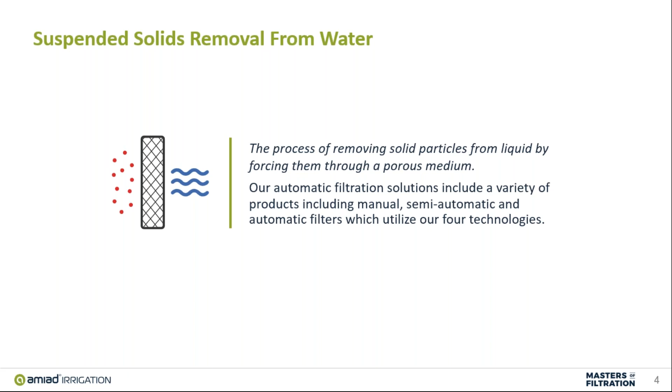Filtration is suspended solids removal from water - the process of removing a solid particle from liquid by forcing them through a porous medium. Our automatic filtration solutions include a variety of products, including manual, semi-automatic, and automatic filters, which utilize our 4 technologies, which we'll talk about throughout this presentation.

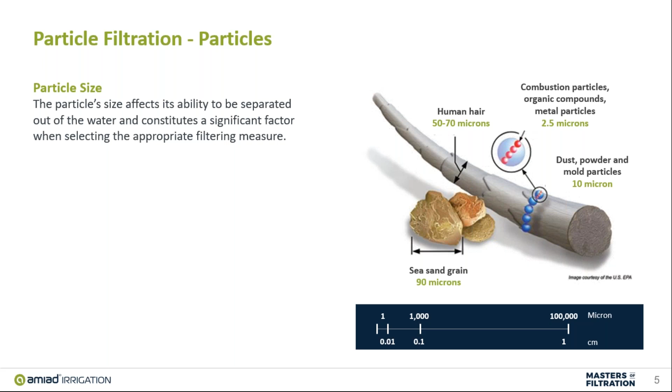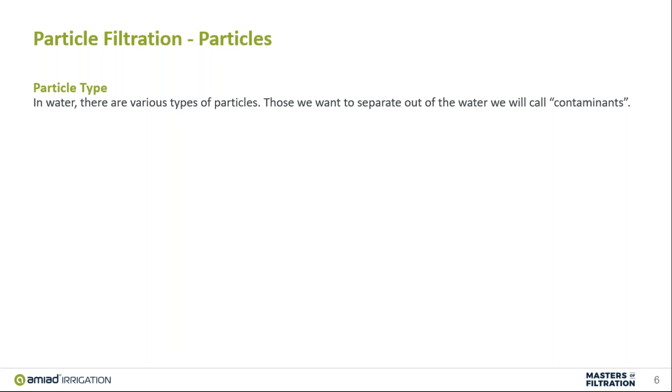Particle type - in water, there are various types of particles. Those we want to separate out of the water we will call contaminants throughout the presentation and our discussions. The contaminants are divided into three main groups: the first being mineral contaminants - sand, silt, debris, iron. Then we have biological contaminants, which is where bacteria and algae come in. And then we have our dissolved solids.

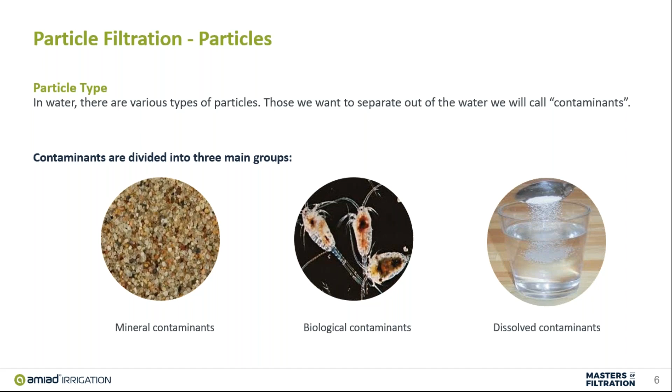So the effects of non-filtration is clogging. Why is clogging or debris in our irrigation systems important to know and understand? Well, in order to understand that, we need to understand our emission devices and the things that we're trying to protect. Severe clogging affects our distribution uniformity, the term used to define a system's efficiency and performance. For every 10% decrease in distribution uniformity, it's calculated as 30% wasted water. This is important in our world with water being such a scarce commodity for us.

Especially when we're discussing emission devices, our industry is moving to lower application rate emission devices, precision nozzling, smaller orifices on our drip systems. This makes for a finer diameter hole that allows our water to emit through, which can cause issues if we have debris and contaminants in our water. This will drive up maintenance costs - not only labor in terms of cleaning those nozzles or drip systems, but also replacement of those emission devices if they get clogged up and go bad.

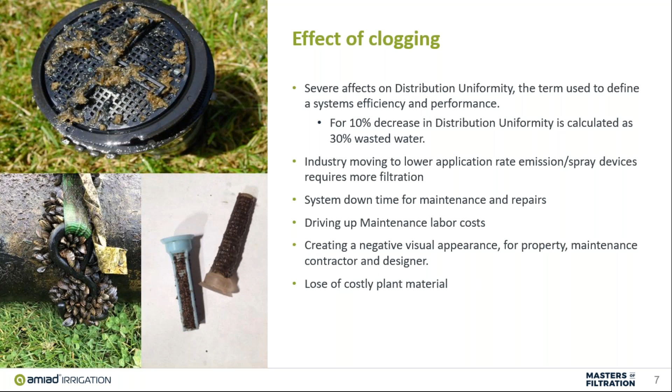So the main defense against clogging is mechanical filtration. The filter element traps and removes suspended solids from the water, not dissolved minerals like salts, but the suspended solids.

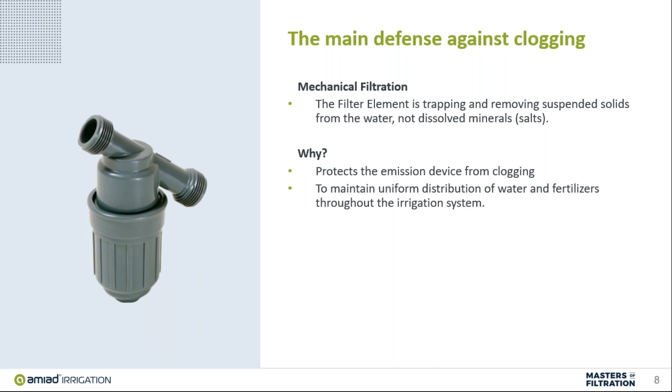So why again is this important? Well, it protects our emission devices. It's like an insurance policy. We put in our filters and we capture those things that are going to cause havoc in our systems, and this will help maintain our uniformity and distribution of water throughout our irrigation.

Part of filtration, we have to understand the water sources that we're dealing with. In the US, we have quite a few water sources that we may see throughout the different areas, and some are more prevalent than others.

Many of us are familiar with municipal water, potable, culinary water. This is generally good, clean water because it's filtered or cleaned at the water districts before it's supplied to you. But we pay for that—it's an expensive resource that comes to our homes and businesses. This still requires some sort of filtration because there's still some suspended solids that travel in that water.

And if the instance comes about where you have damage in a line or something like that where solids can get into your line, it's going to wreak havoc on your irrigation system downstream.

Surface water has been used for many years, but it's becoming more and more readily used as it's available for us. This water is generally poor in quality in terms of debris, suspended solids, algae, and those items that cause havoc on our irrigation systems. It's a lower cost, but it's going to come with an expense to filter.

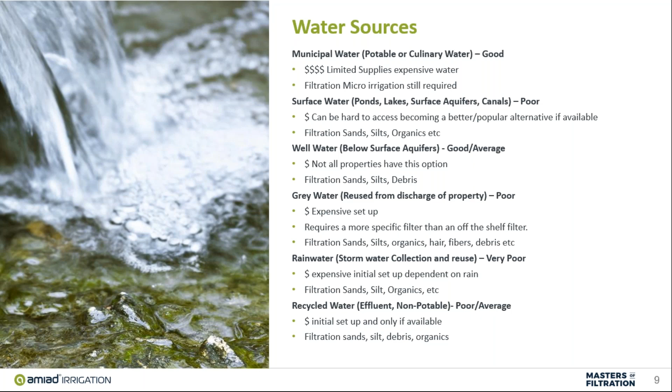All right, so principles of water filtration. We're going to talk about the terminology, the things that come up that you may or may not understand, but maybe we can address those and help resolve concerns so that we understand filtration and what it needs to do for us.

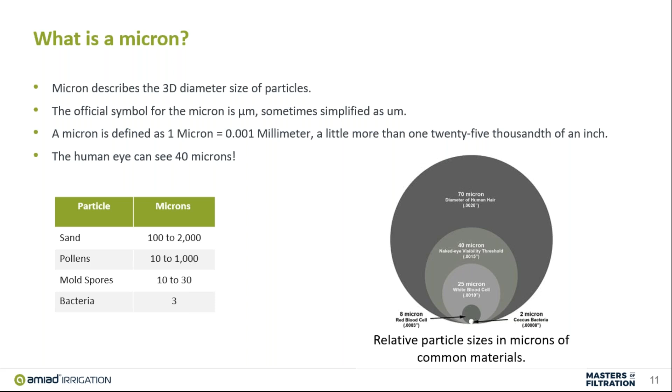Micron is important now that we discuss filtration size. Declared filtration size is based on micron, the results of performance tests done by an official lab. A filter size will be determined based on it capturing or restraining 85% of the particles in that size, so they won't be able to go through the filter. This is done by a third-party lab, an IFTS.

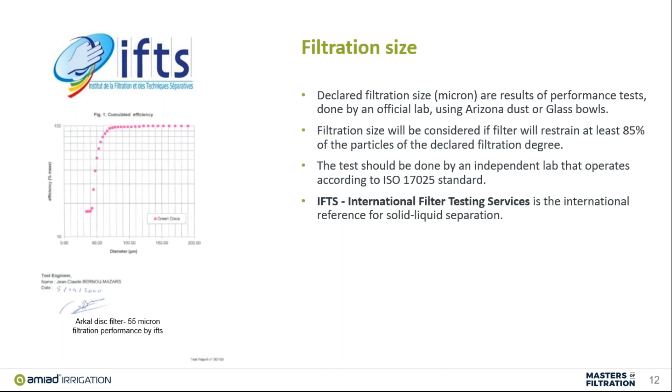Amiad's filtration spectrum by technology ranges anywhere from 1 micron to 10,000 microns. So pretty much, if you have a filter need, we have a filter that can solve the problem.

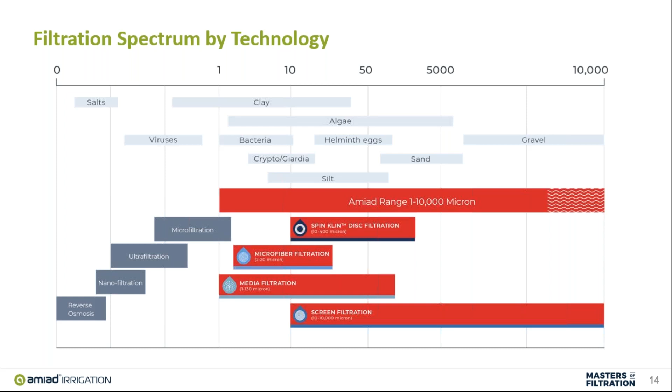There are multiple different technologies for filtration. There are discs, which are widely known in the landscape world. Screens, again, widely known in the landscape. Media, which is known more in the ag world, and separators, also known more in the ag and industrial world.

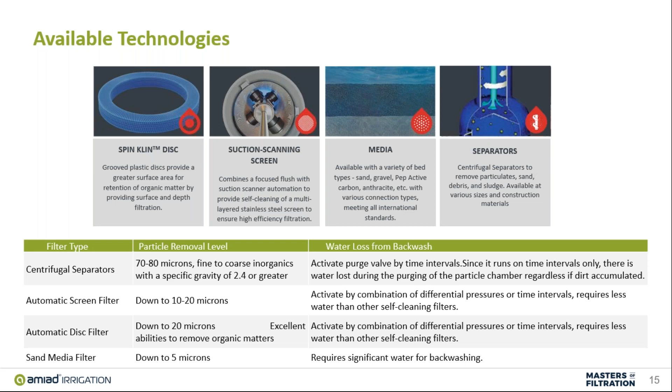We're going to focus more on disc and screen filters, and talk a little bit more in depth on screen filters in this presentation.

Filtration results: before, this is 500 micron, and after. You can see how much debris comes out after the filter. Imagine limiting that down and not having the larger debris going through your system, clogging up your heads, your nozzles, and your drip systems.

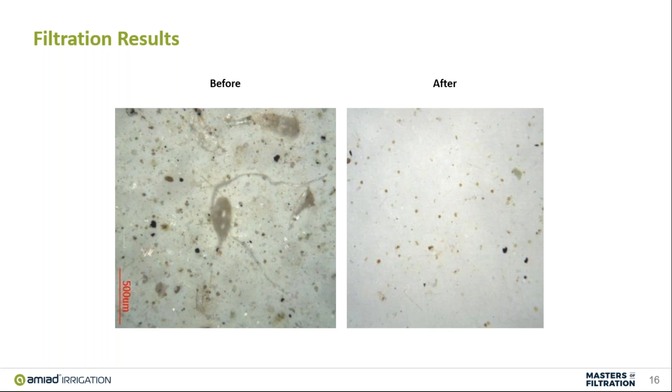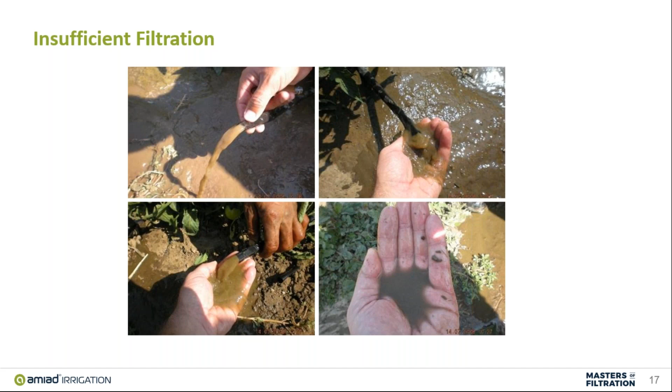This is another picture of insufficient filtration. We don't really want to see dirty water coming out of the lines, because as you can imagine, every one of those clumps or chunks is not going to make it through your drip system, your precision nozzles, or your rotator nozzles.

All right, micron versus mesh. Everybody knows about mesh. Micron is not a new term or new technology—it's actually a more accurate way of measuring things for filtration. The definition of mesh is basically how many wires or fabric lines there are in 1 linear inch of screen.

This definition is actually taken from the garment industry, where our shirts and sheets were made—how many lines of garment or fabric are in 1 inch of screen area.

In this filter world, it's screens or wire. A micron is actually the dimension of the opening of the screen between the wires. So you can see the difference between the terminology and the measurements. And obviously, as you go up in mesh, you go down in micron.

In the landscape world, we're probably familiar with 70 to 80 to 100 mesh. If you convert that over to micron, it's 210 to 149 microns. But you can see how the measurement of mesh doesn't take into consideration the thickness of that wire—it only takes into consideration how many wires are in that inch. So you can see how that term can really have a large variable in there.

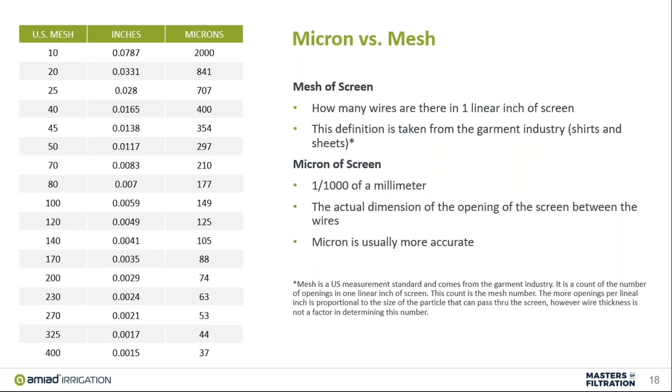This is why we lean on the word micron and use that in our terminology.

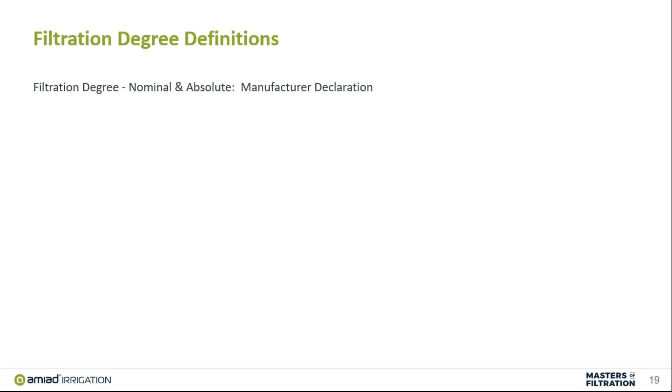All right, filtration degree definitions. There are two definitions we need to discuss: nominal and absolute. Absolute filtration rating means all particles larger than a specific diameter are removed 100%. Nominal means most particles larger than a specific diameter are removed 85 to 99%—again, the Lysol commercial, where you have a percent still sliding through.

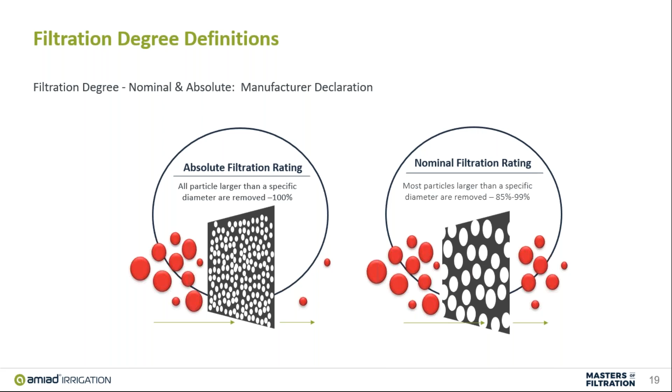So, filtration degree definitions in different screens. On the left, a perforated screen is only going to have the rating of an absolute. The wedge wire, on the other hand, is going to have a nominal, or vertically, and an absolute side to side. Weave wire will have a nominal and an absolute.

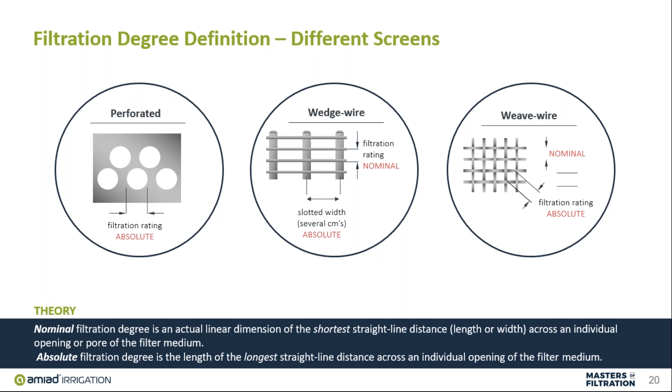All of this talk comes into play when we talk about effective filtration area. When we look at the area of a filter medium which is exposed to the flow of particles in the filtration process, the effective area of the Amiad multi-layer screen element is 95% of its total area. So that means 95% of our screen area is part of the effective filtration area.

We'll talk about why that's important when we get down to our manual filters, and how that affects flow, water use, and cleaning the filter.

Again, filtration velocity equals the flow rate over effective filtration area.

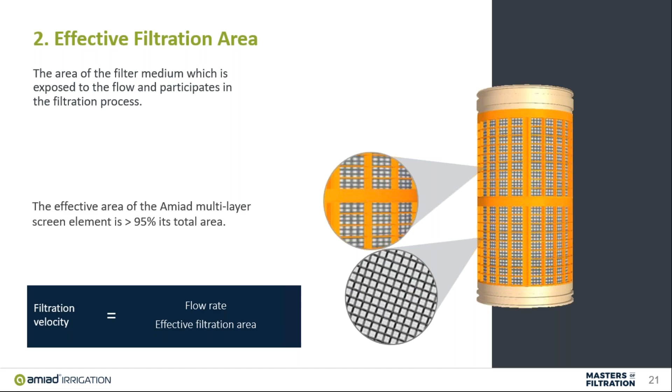Screen filters have 3 different cleaning cycles or styles of cleaning. There's manual clean, where you physically remove the filter element, scrub it, wash it, clean it out, and put it back together. There's the back flush, where you have a valve on the bottom of the filter you can open up and it washes out most or any particulates it can get out of there. And then you have the focused backflush, which is a reverse water flow through nozzles concentrating cleaning to less than 1 square inch, which increases suction force.

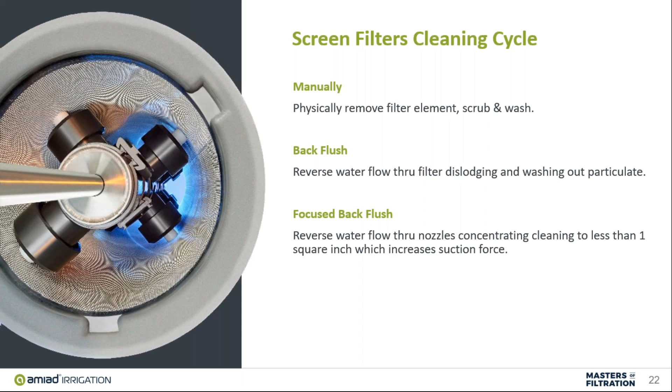When we talk about comparing the levels of technology—manual, semi-automatic, or fully automatic—we want to compare those technologies with the type of water that we have and how that comes into play with what we would select for our project.

Water quality is probably our primary consideration when it comes to selecting whether you would use a manual, semi-automatic, or fully automatic system. If you have decent water, a manual system could work, meaning you're not going to have to clean it more than maybe once every few months, and it's accessible, easy to get to, and not a huge ordeal to clean.

On the other hand, if you have good to average water and you don't want to spend your days cleaning a filter, semi-automatic is your choice, because you can still access the filter and clean it without disrupting the system, and you don't have to take it completely apart to do so.

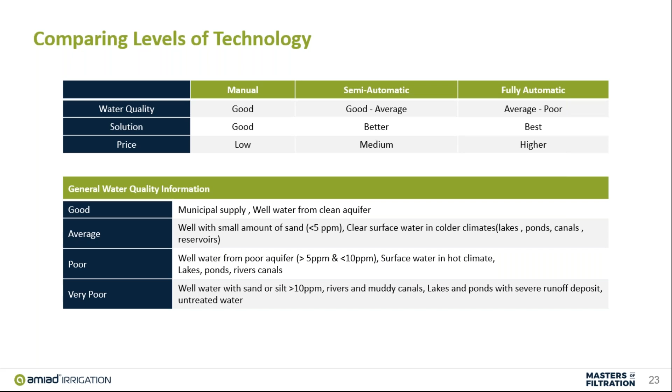Now, on the other hand, if accessibility to the filter is difficult, or if you have average to poor water, you're better off looking at a fully automatic system that will do the cleaning for you without taking your labor time. And again, we've talked about our water supplies in terms of whether good, poor, average, or very poor, and we have a list of them based on what we've determined throughout the nation.

Considerations for sizing a filter—and this isn't necessarily sizing in terms of pipe size, this is sizing based on flow size and what your irrigation demands are. Number one is your flow rate, your gallons per minute—how many gallons per minute you're flowing through your main line or the system we're going to put a filter on. Number two, your static and dynamic water pressure.

This is critical. We want to know this in order to determine what filter will work best in that application. Number three, your water source, whether it's average, poor, or great. If we understand this, we can find a filter that will fit that project.

And then, what are you protecting? That's a big question. Most irrigation manufacturers—nozzles, heads, drip systems—have a recommended micron filtration degree that they'll put on their packaging or spec sheets, which will help you know what you want a filter to do. Utilizing that information will help you select your filter.

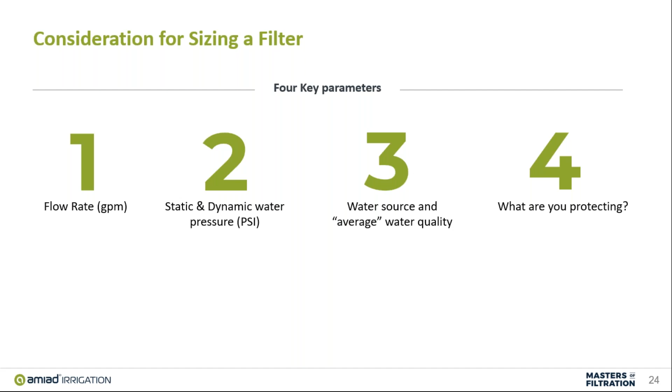Generally speaking, with Amiad, you'll find there are probably 2 to 3 to 4 different filters that we could recommend for any given project, and they'll be successful.

So let's go through some of our filter types and how they can help us and how they apply to our projects.

Manually operated filters—there are pros and cons to any kind of filter you're going to purchase. One of the pros of a manually operated filter is its low cost, simple installation and maintenance. Some manufacturers offer a high quality 316L stainless steel screen. Typically the material used is a polypropylene housing for corrosion resistance. Common sizes for a manual filter range from 3/4 inch to 3 inch.

The cons for a manual filter are that it's time consuming to clean—it takes time to put it back together, and your system has to be off during that process. So when dealing with a manual filter, you want to consider all those options you're going to see in your irrigation landscape. Accessibility is a big one—if you can't get to your filter often enough to clean it, it's going to clog up and you're going to have a distribution uniformity issue or an efficiency issue in your irrigation system downstream.

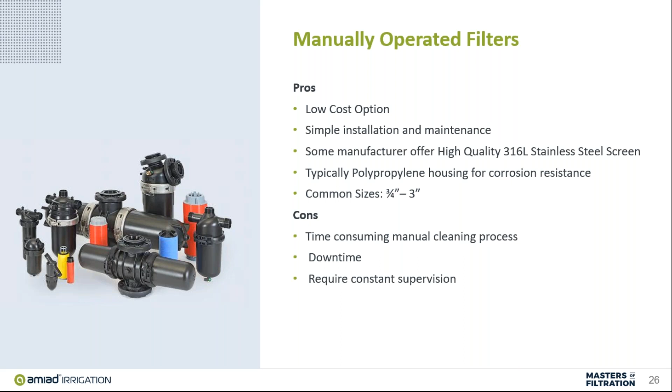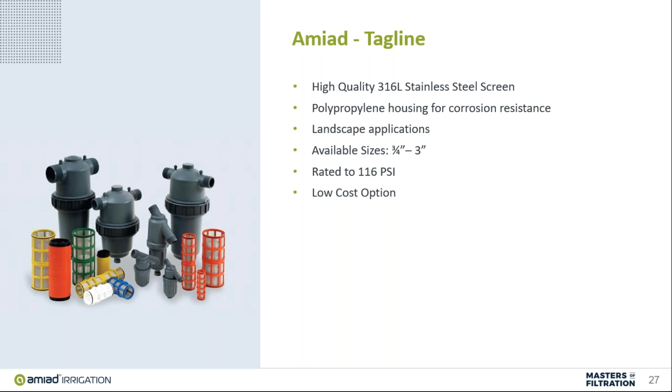Amiad Tagline is the manual plastic filter we have for this application. All of our screens are high quality 316L stainless steel. This is important to know because they're not just coated steel, they're through steel, for corrosion protection and strength. They're all polypropylene housing for corrosion resistance. This is a great filter for landscape application. The available sizes are 3/4 inch to 3 inch, rated to 116 PSI. This is a low-cost option and a great product for your typical landscape application if you need a manual filter that you can get to and clean in a timely manner based on water quality.

All right, I put this screen here for a reason. There's some important things to discuss here. We talked about effective filter area, and we talked about the square or the dimensions of the filter and how that relates to the importance of a filter and timeline of cleaning.

This is how this becomes important for us. When you double the surface area of a filter element, you quadruple the time between cleaning. I want that to be real clear. When you double the surface area of a filter element, you quadruple the time between cleaning.

Most of the screen filters you will see in the industry have about 200 to 250% less screen area than our screen areas on the Amiad tagline, on any general filter that we have. Again, when you think about that and you double that size, you decrease the time you clean by 4 times.

So just think about that when you're going out and putting in a manual filter, and you think, well, if I'm going to have to clean this with the dirty water and the screen area is this, and I'm going to have to clean it every month, if you put one of ours in, you would only have to clean it every 4 months. So it's important to remember that stuff when you're purchasing filters and putting filters in a project.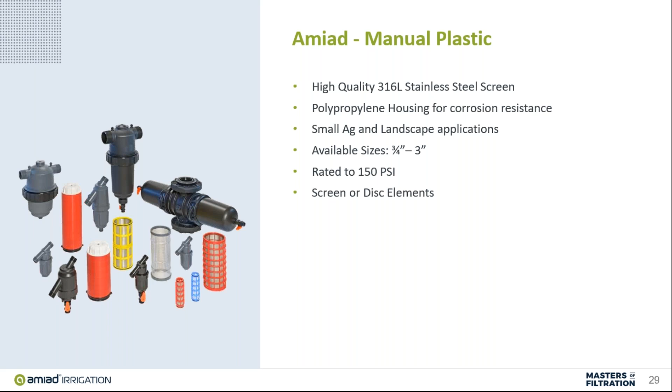All right, semi-automatic filters. Why would you use one? Well, the pros are they're a low-cost option. They're minimal cost and they're simple installation to put in and somewhat simple maintenance. Some manufacturers do offer the high-quality 316L stainless steel screen, the polypropylene housing or steel housing.

Typical sizes on this are 2 inch to 8 inch. They have clogging indicators, or some have clogging indicators. It can be cleaned without interrupting the irrigation cycle. This is important to remember. You can clean these without turning off the irrigation downstream.

Whereas the manual, you have to shut the system down, open it up to clean it. It requires a low pressure for proper cleaning. That's why you can clean it while it's in operation.

So the cons are it does require constant supervision. Somebody has to go out and physically look at it and see if the clogging indicators popped up or if it needs to be cleaned and the system's not functioning properly. You still have to manually go out there and turn the crank. It's kind of like the difference between an automatic window and a cranked window from the years gone by. Many of us will remember those days and some of us probably won't. So it's much like that.

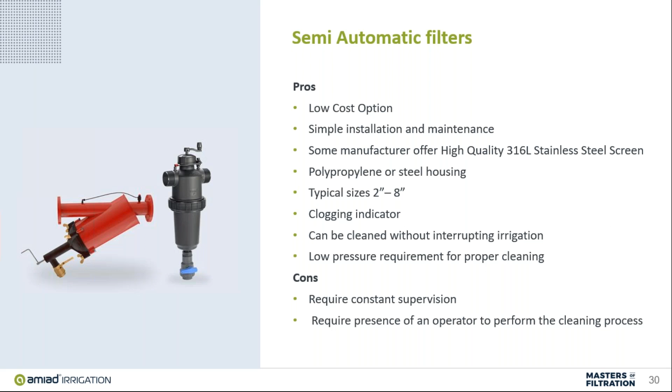In the Amiad semi-automatic filter line, we have the 316L stainless steel. These work great in small ag to landscape applications. Available sizes in plastic is 2 to 3 inch. In steel is 2 to 8 inch. They have clogging indicators on them and can be cleaned without interrupting the cycle. And ours require less than 35 psi for proper cleaning.

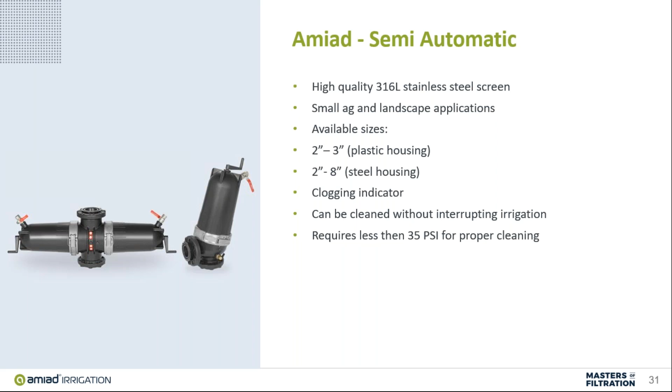All right, we're going to talk a little bit about self-cleaning, how that works. I have a video that I want to show you guys, it's the Mini Sigma series, and it will show you how self-cleaning works and give you a little bit of information about the Mini Sigma, and then we'll talk about how this applies to projects and what we can do with it. I'm going to walk you through the video so that you can understand what we're going through and why we would like the Mini Sigma.

Amiad's Mini Sigma filter.

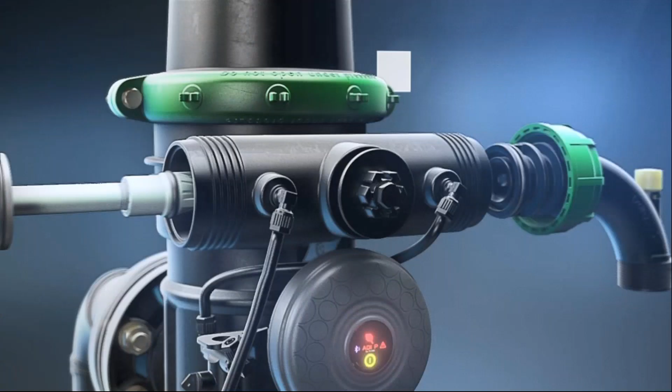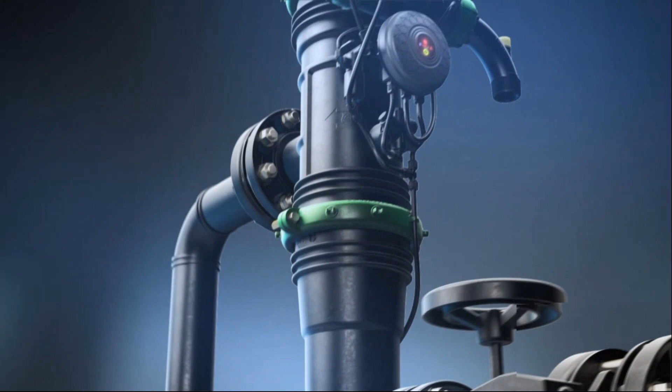Okay, so as it's mentioning, it's low-cost operation for this filter. This filter has a couple different installation styles that you can do, either an angle version like this or an inline version where it lays flat.

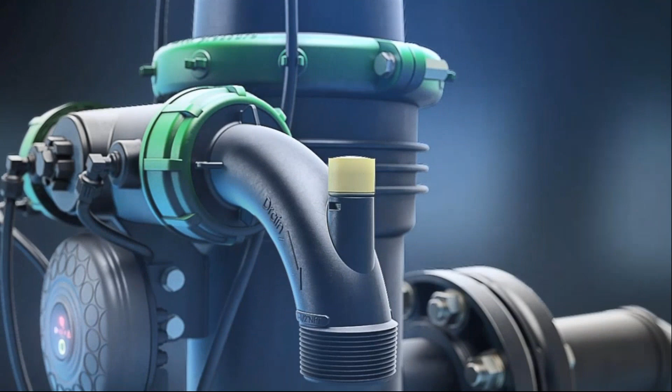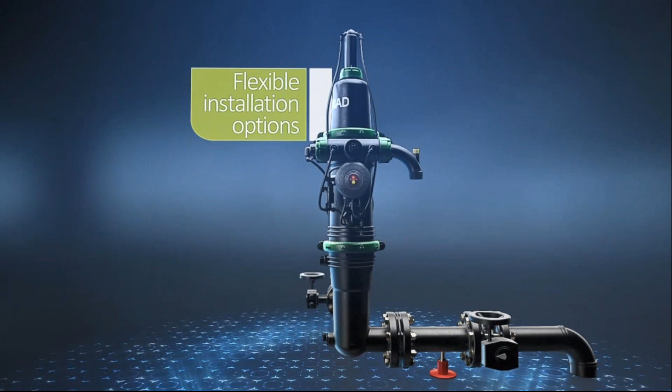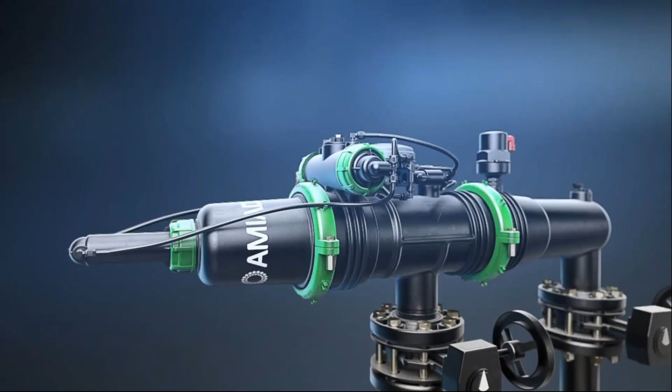It's a very compact, small footprint of a filter, so fitting it into a landscape application is ideal. If you think about it, it doesn't take up much more space than your typical backflow preventer. There are strong boxes and cages that are built specifically for this.

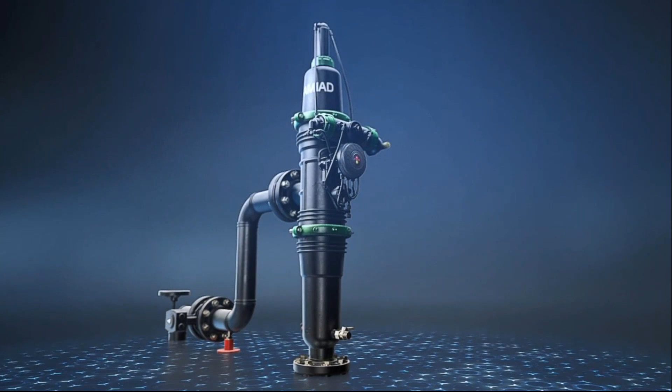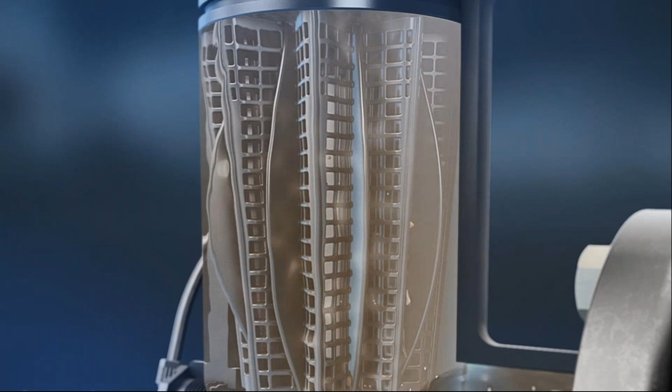As you can see, there's multiple installation applications you can do with this filter. This here you're seeing is the coarse screen. It's the pre-screen to the filter that's going to collect all the big debris before it goes up through. That coarse screen can be clogged or blocked up 85% and it'll still flow properly.

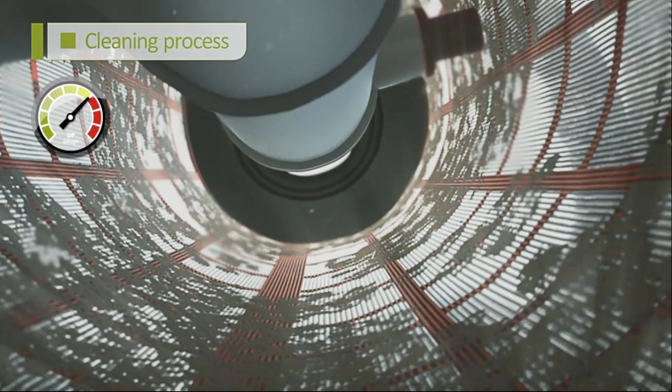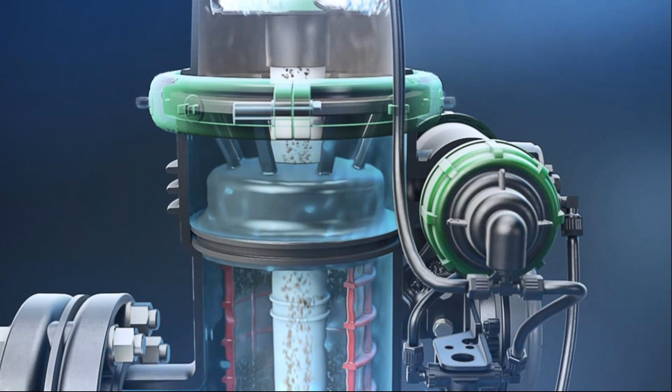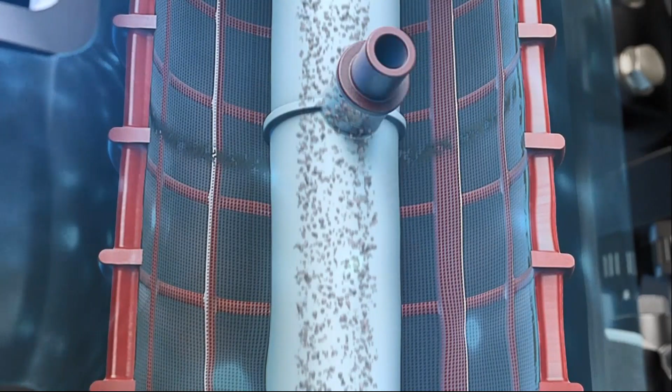This is what I was talking about with the self-cleaning inside. This is the backflush valve that will open, allowing that turbine to spin, which pulls the suction through the suction scanners, moving that around and up, sucking and cleaning all the debris off of the filter screen. This all happens in a matter of about 10 to 15 seconds.

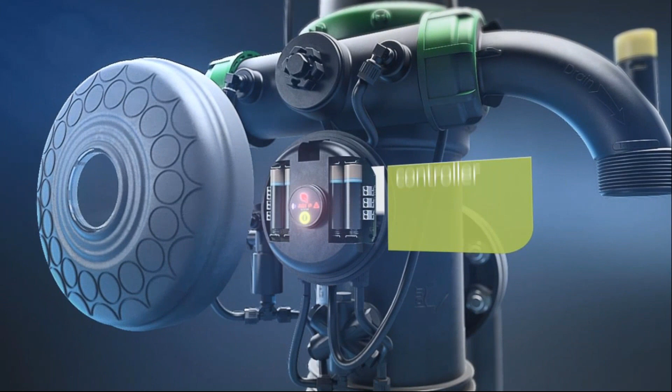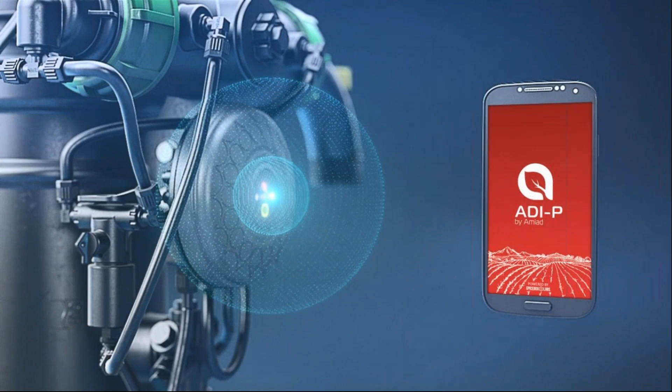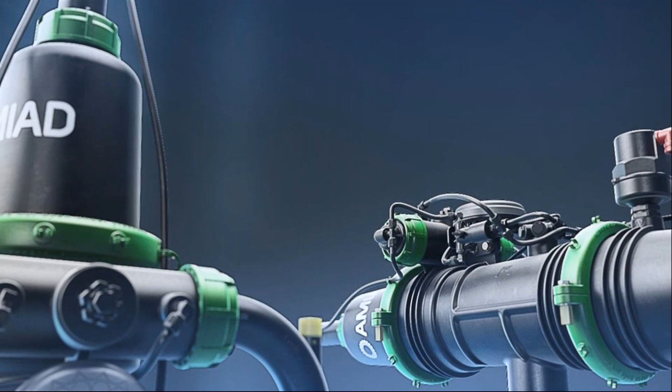This filter is fully automated. It runs off 4 AA batteries. A Bluetooth control, the ADI-P, allows you to operate the system as needed off of this. You can see the inlet and outlet pressure right there in the palm of your hand. You can flush it. You can also get history and data that you can submit back or email to yourself so you can review it and understand what's going on with your filter. So really a self-contained filter that does everything you need for it. No wiring needed, nothing needed to install this filter other than the inlet and outlet.

All right, automatic filter. So what are our pros and cons for having an automatic filter? Well, pros are we don't have to go out there and clean a filter. That's number one. And it can be cleaned without interrupting the irrigation. So that's really important to understand that this system automatically flushes itself, but won't interrupt your irrigation cycle. So your system can be fully running and fully operational.

The other pros is that a lot of them have 316L stainless steel. You can get them in polypropylene or steel housing. 2 to 20 inch is what you'll see in the industry for filter sizing. They're fully automatic, consistent performance of the irrigation system. Some of them offer a wireless control, not many, but some. There's flexibility of installation, which is one of the great pros with an automatic filter.

The cons are some require high minimum pressure to sustain the cleaning cycle, so they need a little bit of pressure to keep them going. And then some require a long flushing cycle, which has a high discharge of water.

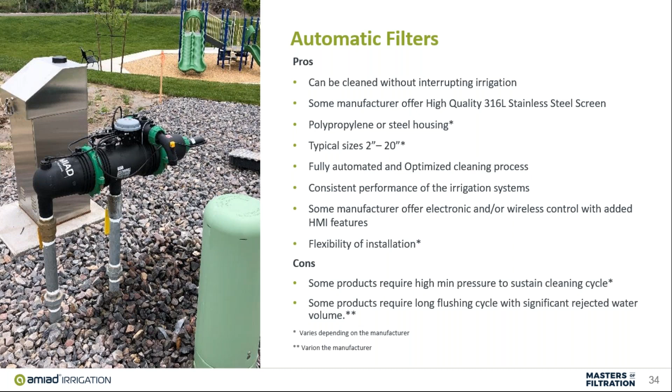So what you guys saw was a series, the Mini Sigma. There's a series called the Sigma screen filters, which the Mini is part of. This is our fully automatic polypropylene housing filters. All of ours offer the 316L stainless steel screen. They manage good to poor water quality. They're great for small to medium ag and landscape. We see them in pumps, housing, cisterns, recycled water, you name it, they're going in.

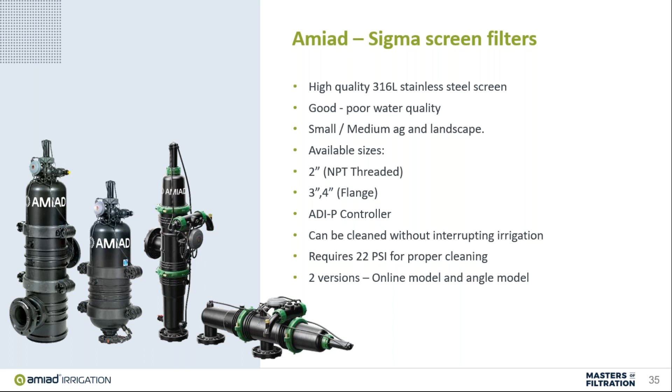Available sizes 2, 3, 4, 6, 8 inch in the black plastic. They have the ADI-P controller, all of ours do, that is fully operational off of 4 AA batteries. And again, it can be cleaned without interrupting your cycle. It has a 22 PSI proper cleaning requirement. And there's 2 different versions, the online or the angle model.

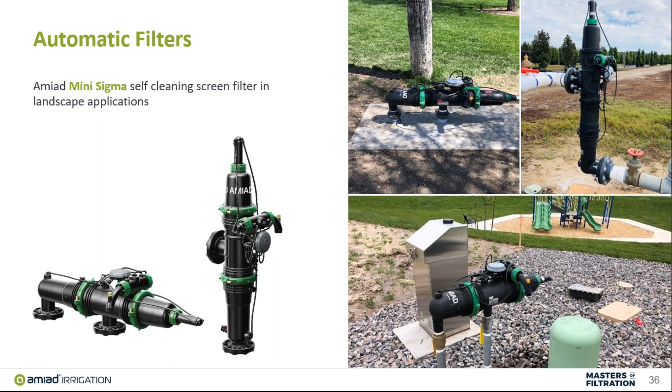The Mini Sigma is our primary one that we look at in the landscape, between that and the Filtamat, which is a steel housing. These filters are great for landscape application, great for dirty water, for pressurized irrigation, for recycled water. And again, we have details and CAD drawings that work with all of these filters and can be utilized throughout all the states.

Okay, so we're going to go back to that same question that we talked about: what's the best filter for my application? Manual filters - if your water quality does not clog the screen in a very short time, and or if you have the manpower to clean the filter, then a manual filter will work for you. A semi-automatic filter is great if the manual filter is requiring too much and your water quality is average. An automatic filter works great for those properties and or maintenance contracts where they're not going to be on the property every day and they need something to be automatic, so the system is functioning fully and capable of what it's able to do for the efficiency of the system.

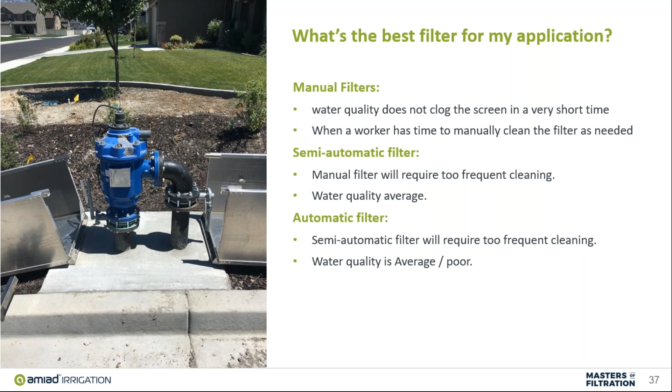So that's really the nuts and bolts of it in terms of what you would choose for your application and how it would benefit your property and your project. Every project's going to be a little different. I have a few pictures of some installations and some different things that have been done on various projects. And then we'll jump into some question and answers and run through some things with that.

Generally speaking, these filters will be installed above ground, but they can be installed below ground. Many of the manual filters and some of the semi-automatics can be, however the complexity of operation will depend on whether you put it in the ground. You'd need a jumbo box to put some of these in the ground, but keep in mind cleaning becomes difficult the more you compact them into the ground. They also need some atmospheric break between them so water can flow out properly for good cleaning. So generally we suggest installing them above ground in a cage or protected area, but if your application requires it to be in ground, it's something that can be done.

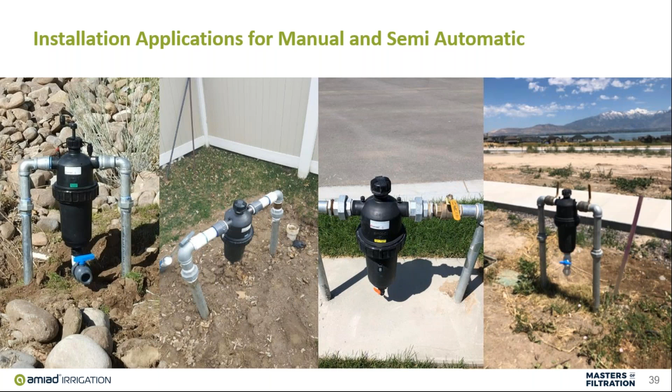Here's a Mini Sigma that was put in, actually at a farm pond, and it's utilized to protect drip. It's pumping 167 GPM at 100 micron. This is an angle installation.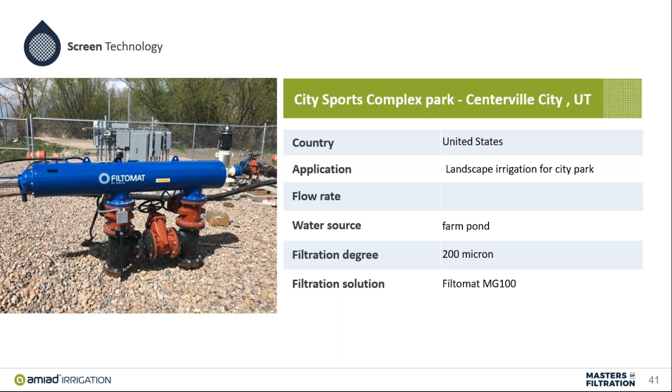This is also a Filtomat. It's a very similar type of application and use as the Mini Sigma, except in a bell style, so it's a little more compact. This is for your higher pressures - it's going to handle a little higher PSI and a little more GPM than what the Mini Sigma would do.

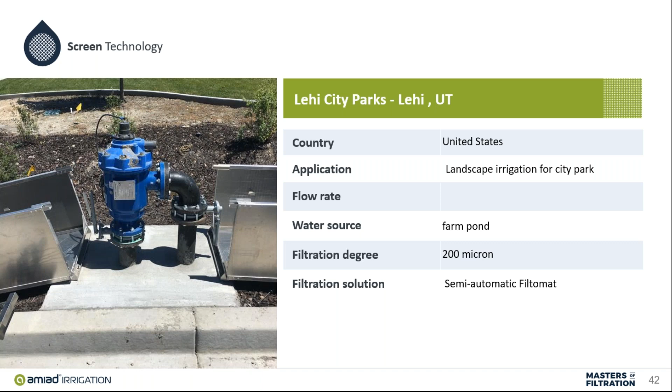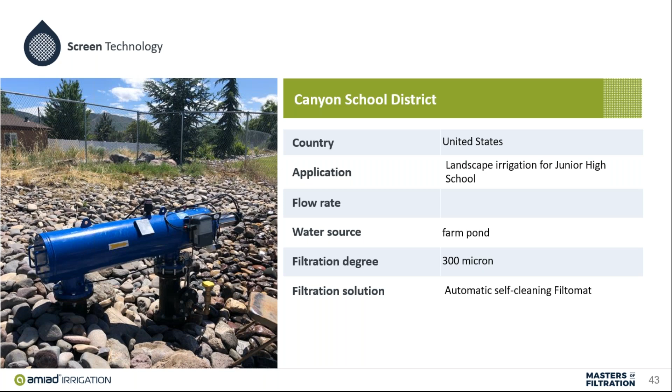Again, another Filtomat that's installed, this one on a landscape irrigation system for a junior high school. Most of these are on pressurized irrigation, so the water's pretty dirty. Here's one for a city park.